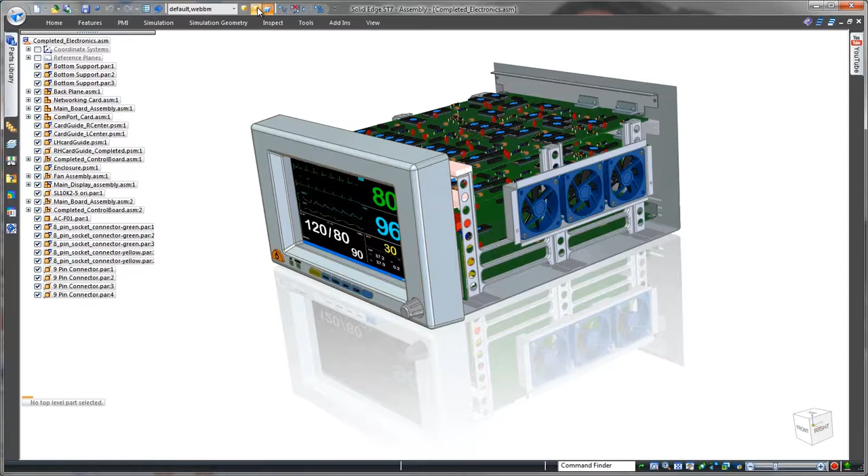We'll use Solid Edge to complete the enclosure of this heart rate monitor. Solid Edge with synchronous technology excels in sheet metal construction, allowing designers to efficiently work with surrounding components to define external product housings.

In most CAD systems, the user has to modify a part independently from the overall product assembly. With Solid Edge, additional flanges can be created at the top-level assembly just by selecting and dragging the plate's thickness faces. No special command necessary.

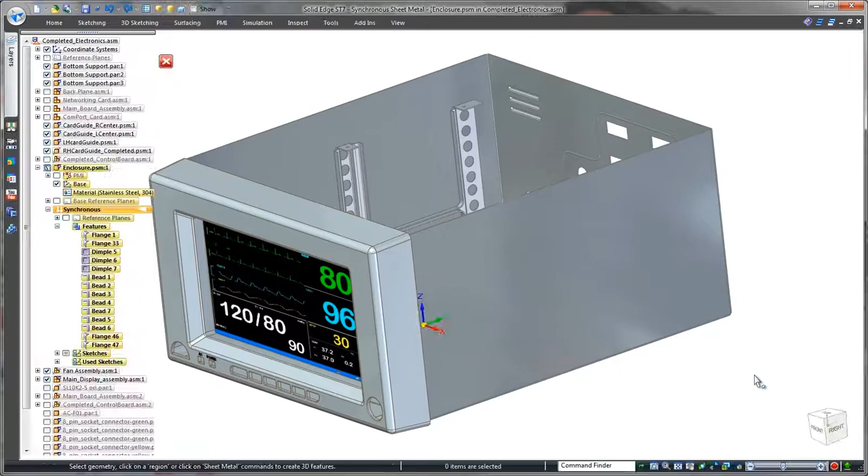Medical device manufacturers must adhere to strict government regulations, and any gaps between panels could be faulted. Using the close corner command, these gaps are eliminated.

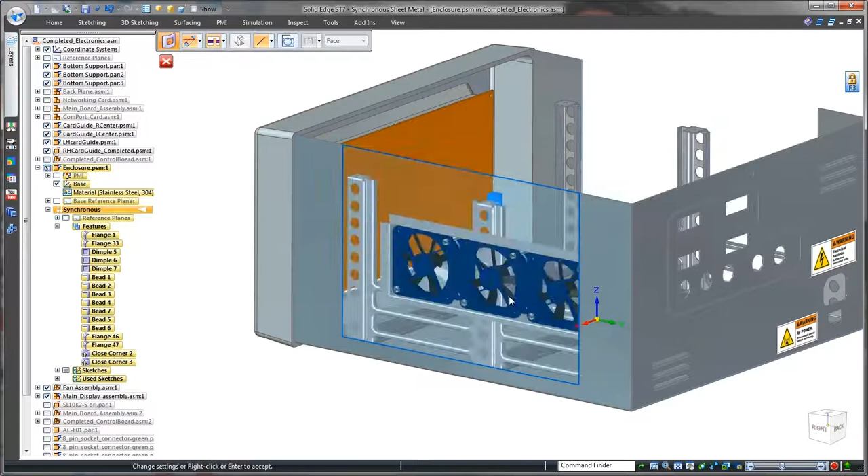The internal circuitry produces a large amount of heat, so normal operation of this monitor relies on cooling fans. To provide clearance for airflow, we'll define rectangular cuts on both sides of the enclosure. Synchronous modeling provides several methods to intuitively match the size of these openings to the shape of the fan assembly. Now that was fast and easy.

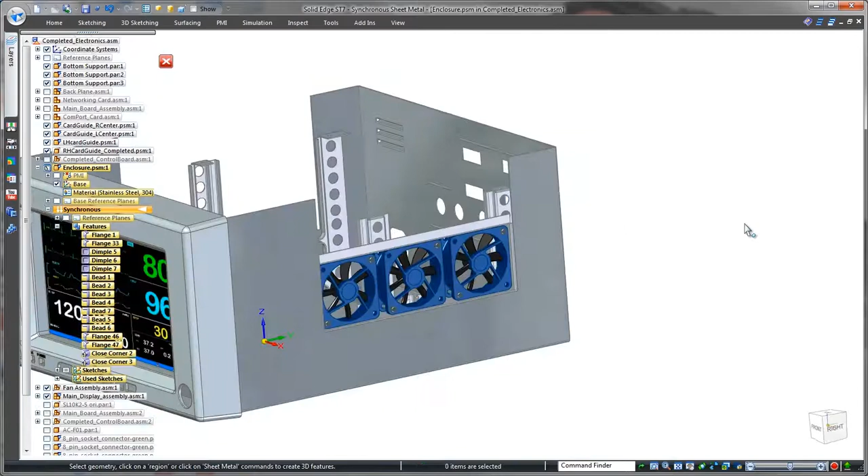Next, we need to create a locking tab for the enclosure's lid. Here we'll select the thickness face, but opt for a partial flange to create this tab. Using one of many handy options, we'll ensure its top is flush with the top of the part.

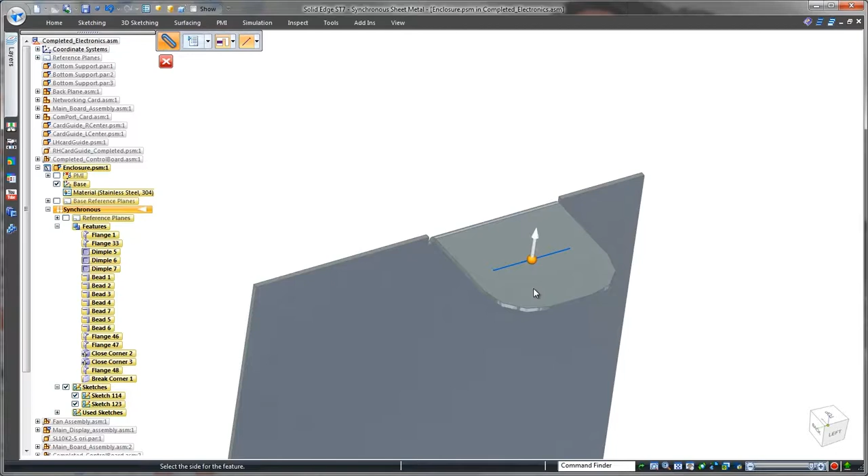We'll lock in a precise tab location using 3D dimensions. To meet safety requirements, simple rounds will remove sharp corners. The locking tab requires a starting slot, and Solid Edge needs only a sketch line to create the slot.

We'll place a hole in the slot to complete the locking tab. We get the required clearance between the top of the locking tab and the lid by pushing the tab's top face deeper into the part.

Another modification made easy. The locking tab needs to be stiffened, so we'll use the gusset command. Simply specify 2 gussets and Solid Edge automatically computes the spacing between them.

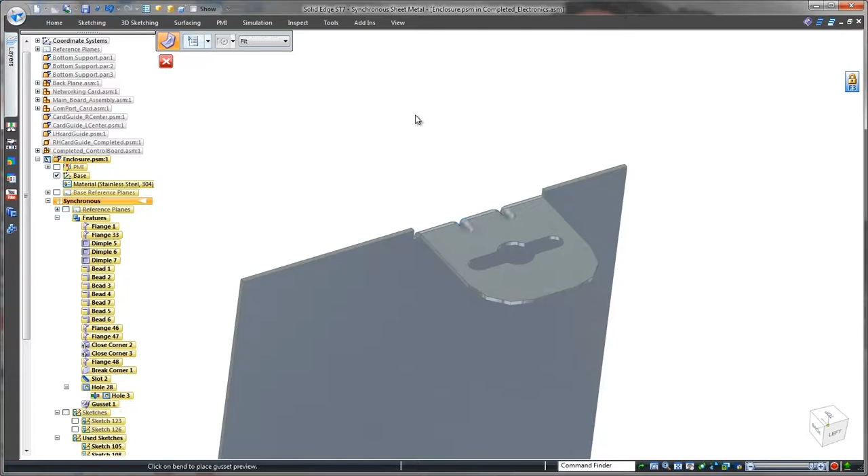Since an identical tab is needed to lock the lid on the opposite side, we'll quickly fence select and mirror these features to the other side. This completes the design of the enclosure's base.

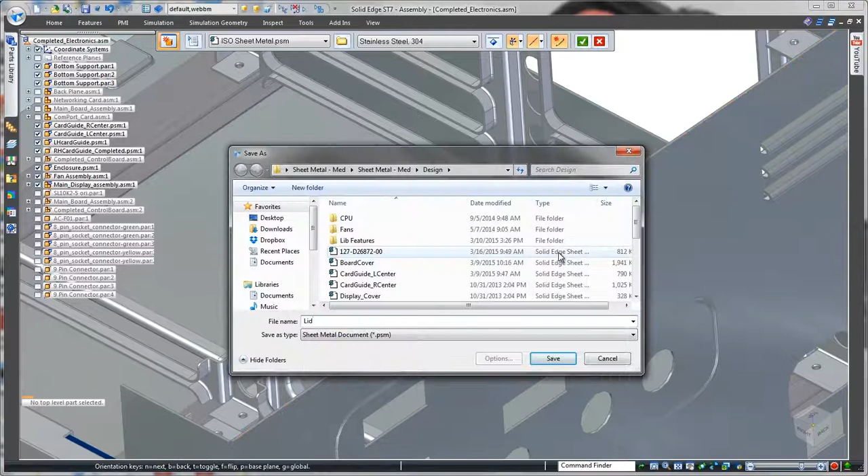Now we'll create the lid. This is where the power of Solid Edge top-down design is realized. By constructing our housing in the context of surrounding components, we can ensure all holes align and mating parts match the first time, avoiding costly rework and eliminating scrap.

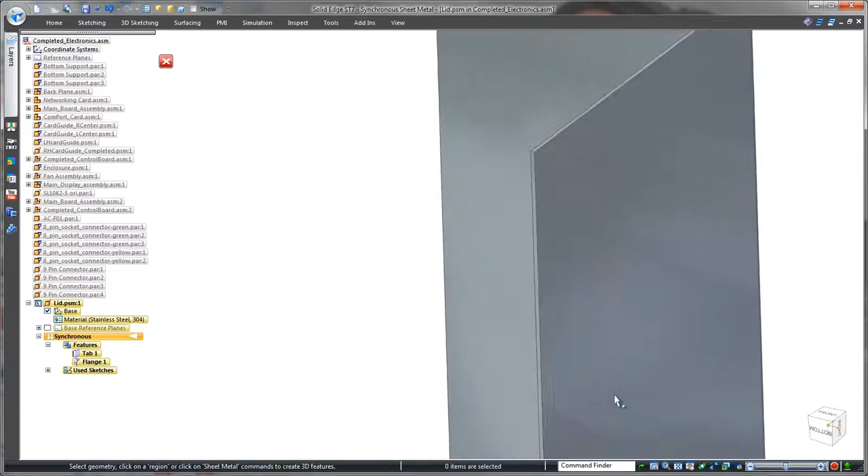As before, we'll create a new flange just by dragging the lid panel's thickness face to the length we need. On the front of the lid, we need a flange that wraps to the underside of the control panel. The contour flange command not only creates a more complex flange that will fit just right, it also allows us to close the inside corners too.

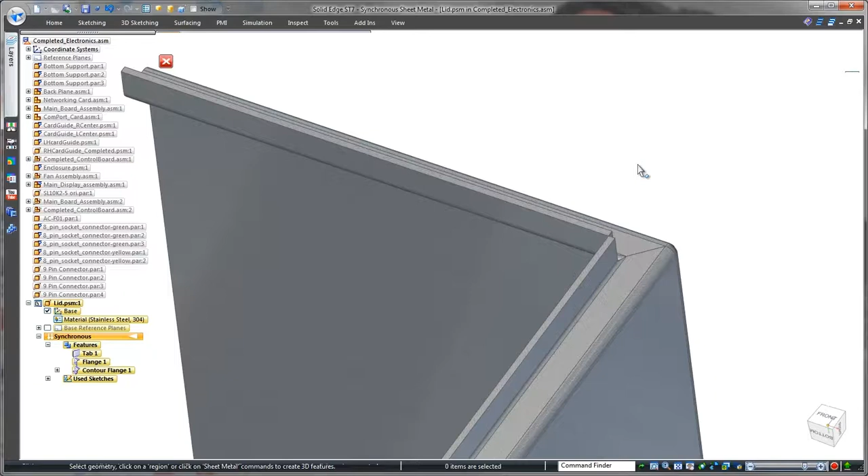Notice this bend radius doesn't match the rounded corner of the control panel. No need to access the history tree, just select the bend and change the radius. Again, that was easy. Remember the fans?

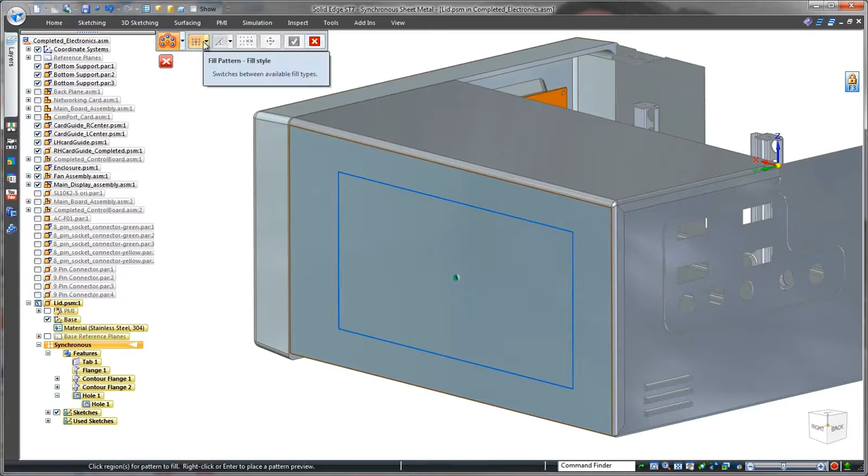Proper operation will require a vent on the side of the lid. We'll create this vent by sketching a rectangle to define the vent's extent and patterning a hole using the fill option. It's as simple as that.

Notice that we have an interference problem between the lid and the front of the control panel. Applying a synchronous relationship will move the vertical flange flush with the control panel's thickness face. That was an easy fix.

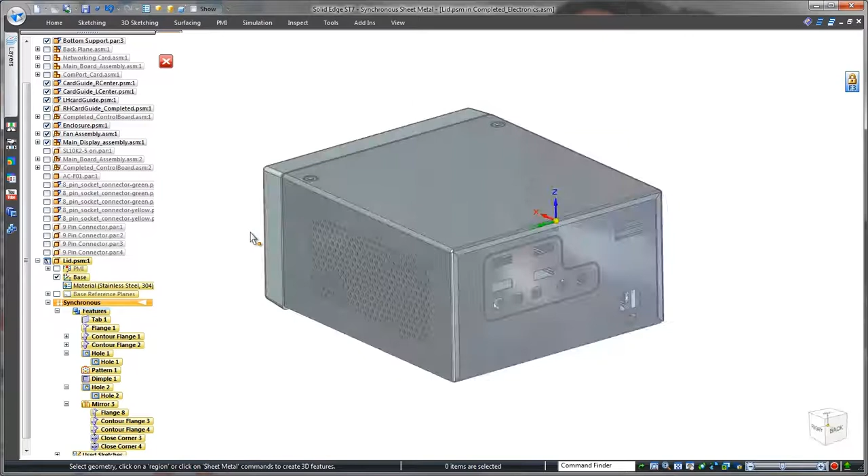We'll finish the enclosure by mirroring this lid half around the thickness face of the part. Solid Edge facilitates creation of manufacturing information, often with little user intervention. Watch as we automatically derive a bend table from the lid model.

Finally, we'll generate a flat pattern for use in a downstream manufacturing drawing. In this case, we'll insert the bend table and add a few coordinate dimensions.

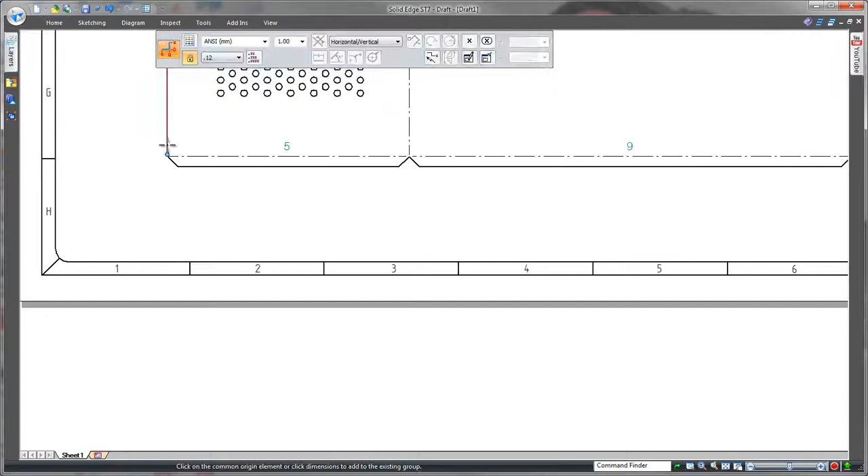Direct interaction with surrounding geometry, coupled with industry-leading sheet metal design tools and innovative modeling capabilities, makes Solid Edge the choice for companies looking for an edge over the competition.